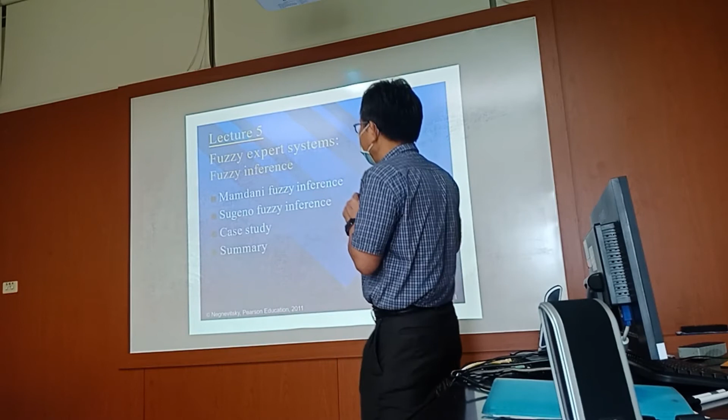Fuzzy reasoning method. Is the reasoning still used today? The answer is yes. Even now, when you read Fuzzy papers, they implement some system and introduce their methodology. They also use Mamdani, but sometimes they combine it, not just only Fuzzy, combine with the genetic algorithm, combine with maybe a CNN model, or combine the neural network with the Fuzzy system.

So in this chapter, we hope to introduce how the Mamdani Fuzzy inference operates, and based on the Mamdani Fuzzy reasoning, the Sugeno Fuzzy inference is easy to understand because they just make a little modification to Mamdani. And we have a case study.

Fuzzy inference. The most commonly used Fuzzy inference technique is also called the Mamdani method. In 1975, Professor Mamdani from London University built one of the first Fuzzy systems to control a steam engine and boiler combination. They applied a set of Fuzzy rules supplied by experienced human operators.

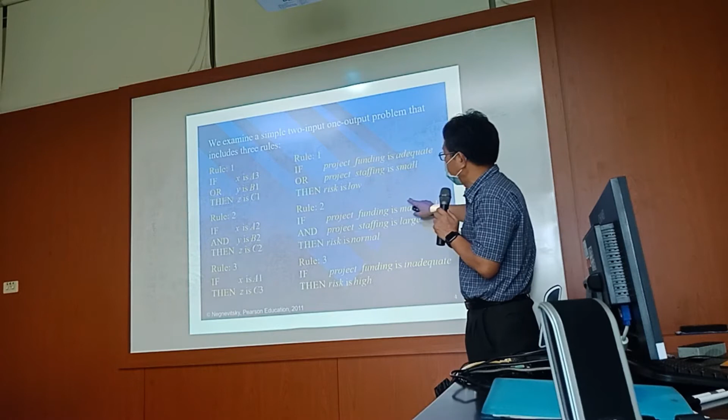and A2 here is marginal, and B2 here is large. So project funding has a membership function adequate, a function marginal, and a function inadequate. Those are the different membership functions of the system.

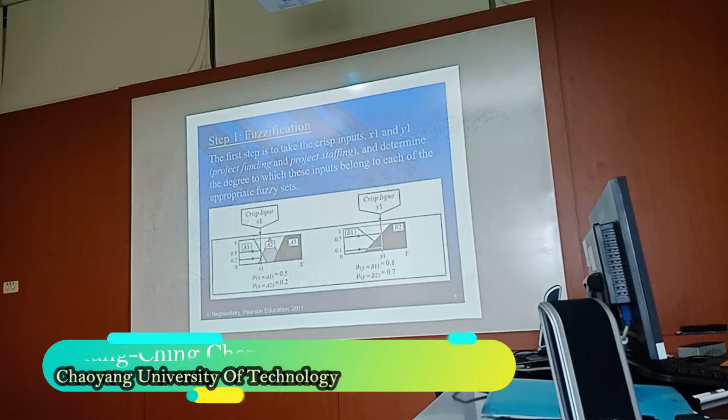So the first step of the Mamdani system is fuzzification. We need to map the linguistic variables of our problem to a membership function. That means fuzzification. Then your problem is fuzzified.

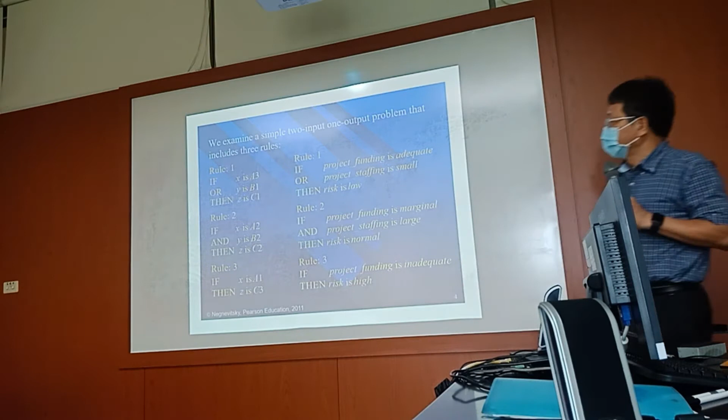So here A3 means adequate. A3 is adequate. A1 is inadequate here. A2 is marginal. So A1, A2, and A3 are about the project funding, the linguistic values of the project funding.

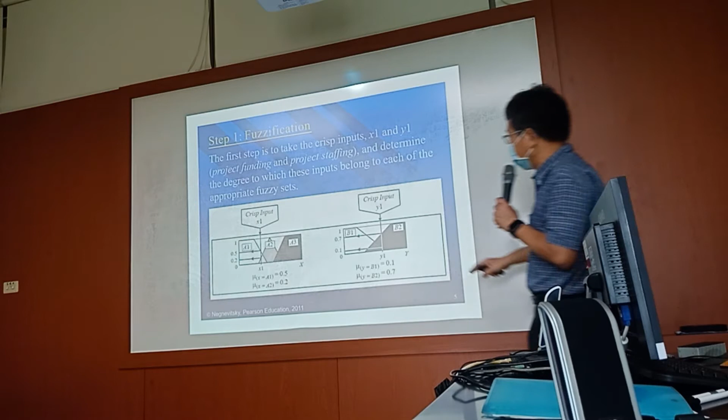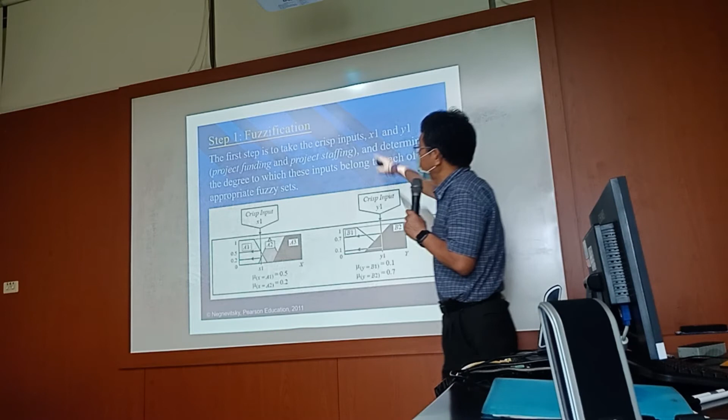And Y is the staffing, the number of staff. Staffing is large or small, so it has two membership functions, large or small. So to solve it, we use the Mamdani method. The first step is fuzzification. And then we find the next step.

Next step we do the rule evaluation. Rule evaluation is based on the membership function and based on the AND or OR operation, and we select the minimum or select the maximum. So for rule evaluation, based on this, we try to find whether it is an OR operation or an AND operation.

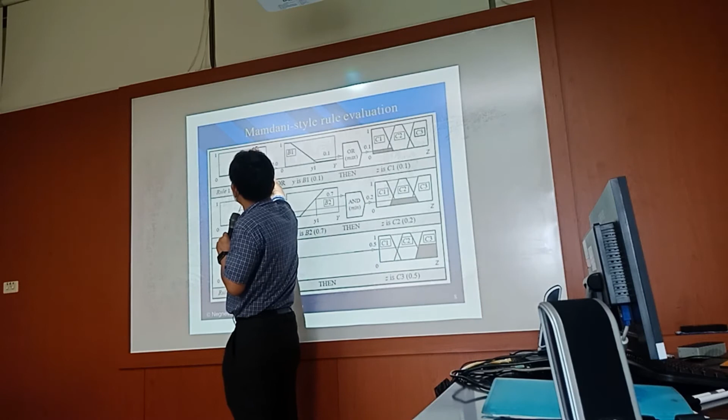So for the rule here, X is A3 or Y is B1. A3 is the membership function here. B1 is the membership function here. We do the OR operation. A3's value is 0.0 and here is 0.1. Then the OR operation maximum is 0.1.

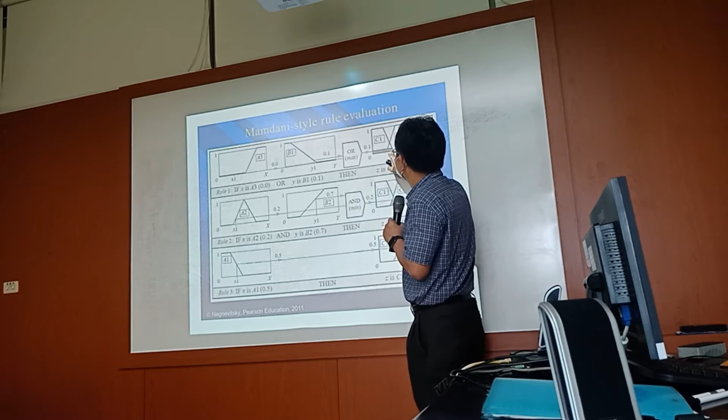0.1 maps to the membership function. Now we find that it belongs to C1. It belongs to C1 with 0.1. And rule 2 is an AND operation.

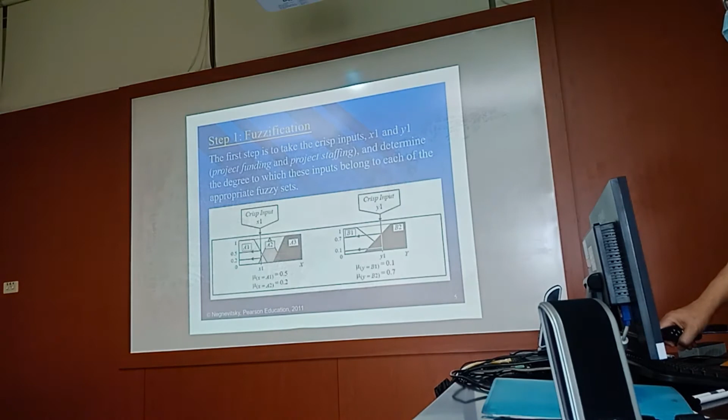The AND operation here selects the minimum. Select the minimum, this one. Because this rule maps to C2. The rule here maps to C2, so its value is on C2.

And the third rule maps to C3, but with only one condition, so no AND or OR operation. And then, for example, if three rules are defined, then we need to summarize the result. In this step, we do the rule evaluation, but we need to summarize them.

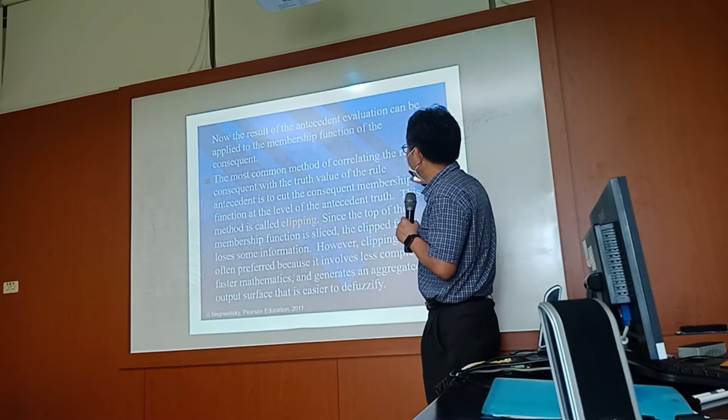So now the result of the antecedent evaluation can be applied to the membership function of the consequent. The most common method of correlating the rule consequent with the truth value of the rule antecedent is to cut the consequent membership function at the level of the antecedent truth. This method is called clipping.

Since the top of the membership function is sliced, the clipped fuzzy set loses some information. However, clipping is still often preferred because it involves less complexity. And we can see what clipping is, and another term is scaling. Now we use a graph to explain it.

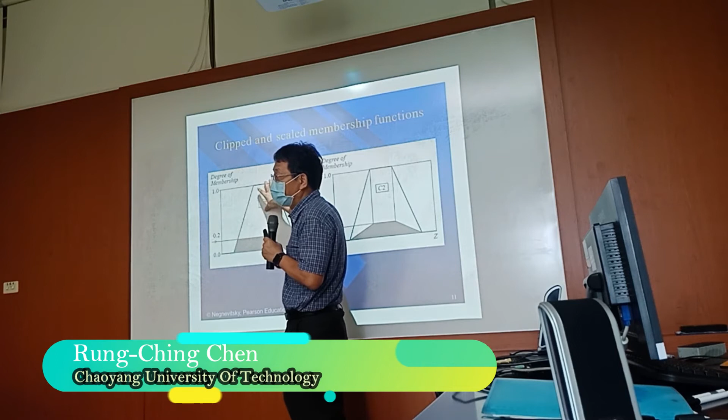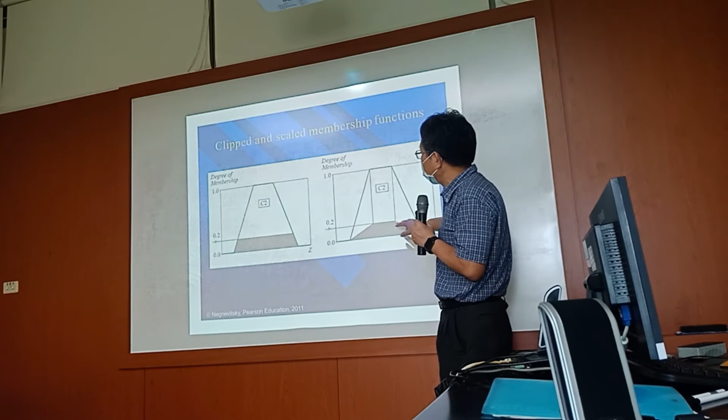For example, here the membership function, because your membership function value is only from 0.0 to 0.2. So this part is not useful. That value is very small. So if we try to make it easier to separate the different conditions, we can make this figure into this one. How do we make it? The mapping is from here.

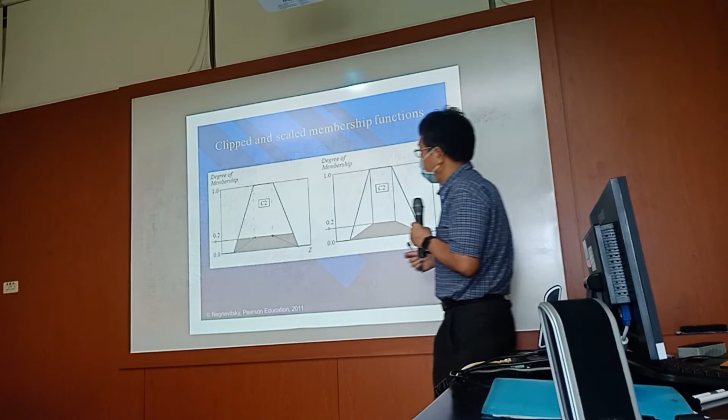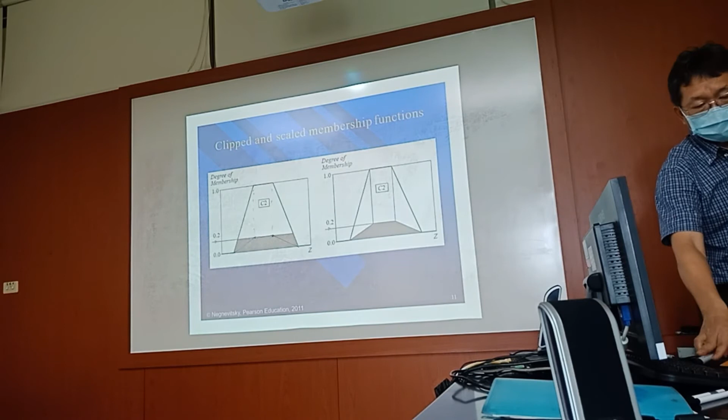So we just change the slope, change the slope to this area, because that will make it easy to separate the different conditions. You can also normalize it to 1, and then the range we can. But it is still the same membership function. It only needs a mathematical conversion to do it.

So in much research, when we do research for a paper, because the scale does not easily separate the data, we sometimes need to transfer it to a different domain. For example, support vector machine. In 2 dimensions, we cannot separate the data. We move it to 3 dimensions to separate the data. That is a similar idea to clipping and scaling the membership function.

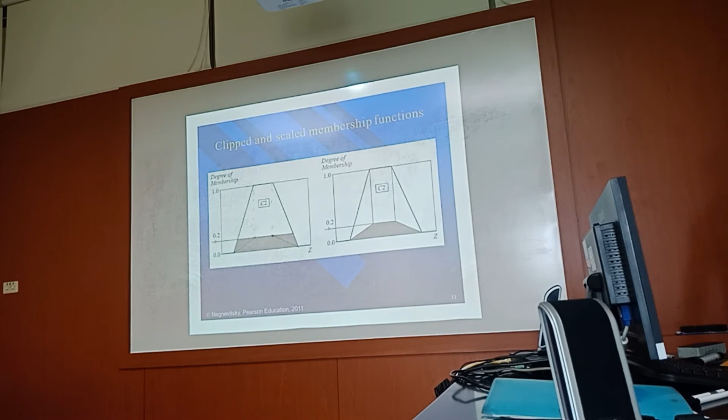So the third step is aggregation of the rule output. Aggregation means to summarize. Summarize which one? We try to summarize the 3 results. This one, this one, this one. Because sometimes when you run it, multiple rules may fire. Fire means issue. Some rules are issued. So we summarize the result. But how do we summarize it? If we summarize based on this figure, we can find this new figure of the summation.

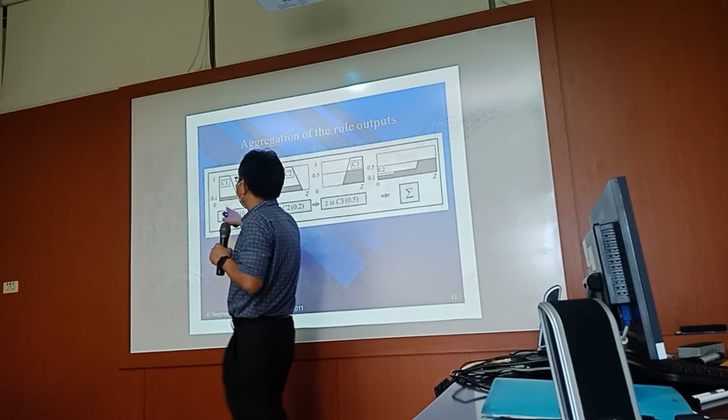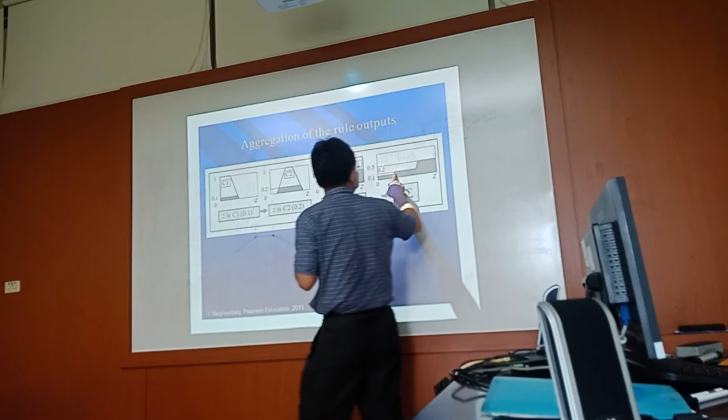Summation is also based on the slope. This point, this point, this point, and find this point. So we can add them and the shape becomes like this. Okay? Adding point by point to summarize, and we find the figure on the right side.

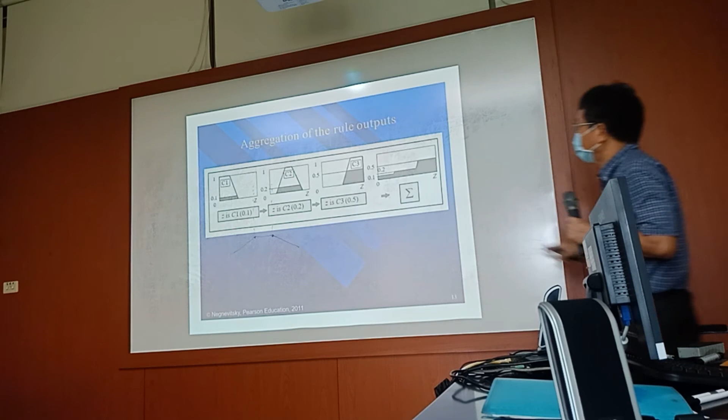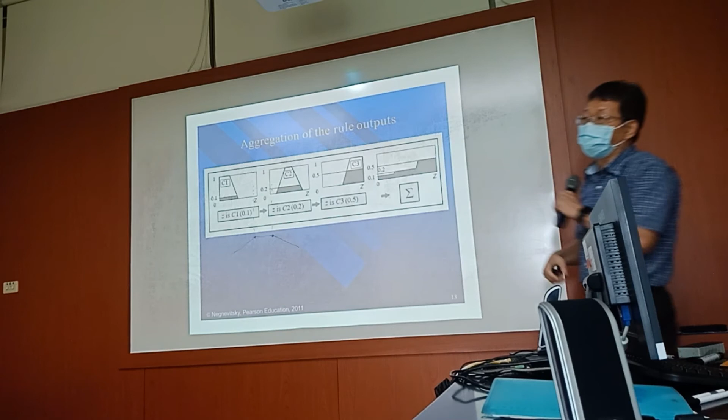And the last step is defuzzification. Defuzzification means that we try to find, because this is a multi-value, we don't understand what the real value is. We hope the output is a single value that we can control. So in industrial control, we need to summarize or try to find the weighted central node. So how to find it?

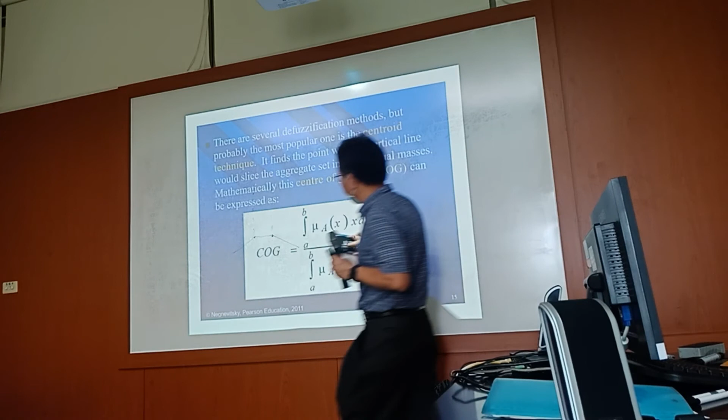We use a formula that tries to find the center of gravity. The center of gravity is based on this mathematics. In Chinese, we say 找出它的重心, center of gravity.

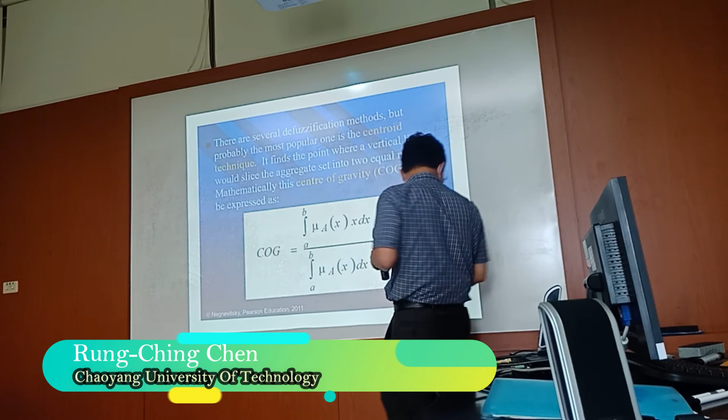Center of gravity. In these two parts, the difference is here. This is based on mathematics. Here is x. Here is no x. That is the difference. Center of gravity. So, for example, in this example, we try to find the center of gravity of this figure. Now we can find the value is here. So the center of gravity of this figure is this node. This node means maybe that is height. His height is 184.

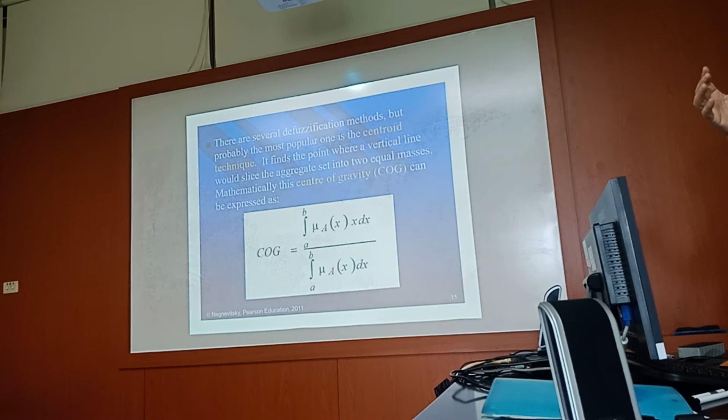In this formula, how do we find the gravity? If we use the integral method, the computation time will be long and waste time. So sometimes we transfer it to discrete computing. That can save time. So we discretize this by sampling some points to find the value. For example, we use ten as the scale. So we can find the first node is here.